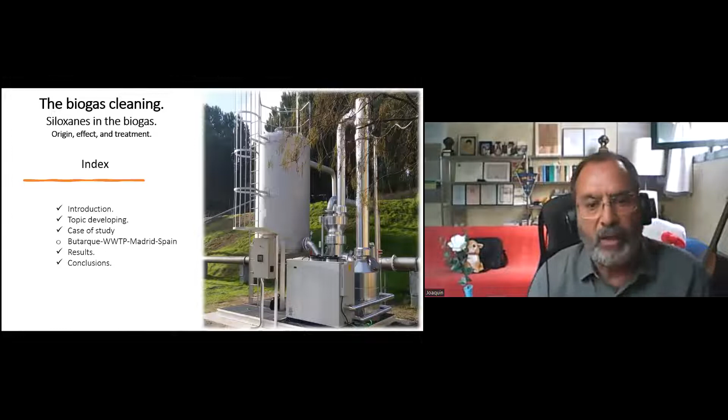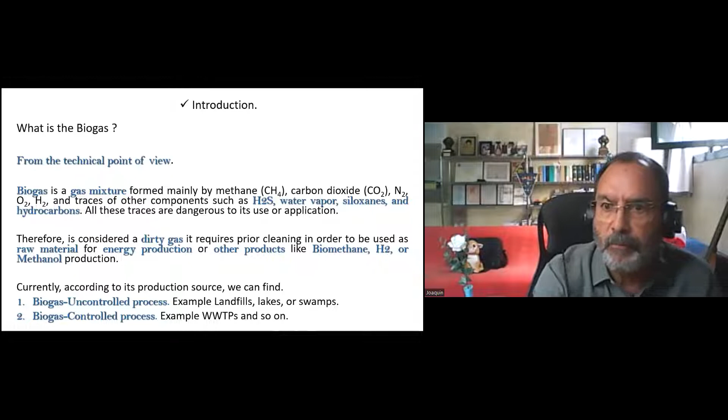Okay, what is the biogas? There are many definitions related with biogas, but for all people, staff, or engineering groups related with biogas cleaning, biogas is a gas mixture that has two main parts: one part, the major part, methane, carbon dioxide, oxygen, hydrogen, and other, and another part that is the impurity. These impurities are mainly hydrogen sulfide, water vapor, siloxane, and hydrocarbon. For that reason, biogas is always considered a dirty gas that requires prior cleaning in order to be used as raw material for energy production or for another product like biomethane, hydrogen, or methanol.

According to its production, we can find currently two kinds of biogas: biogas coming from an uncontrolled process, for example landfill gas, and biogas coming from a controlled process, for example wastewater treatment plant and other kinds of product by the digester process.

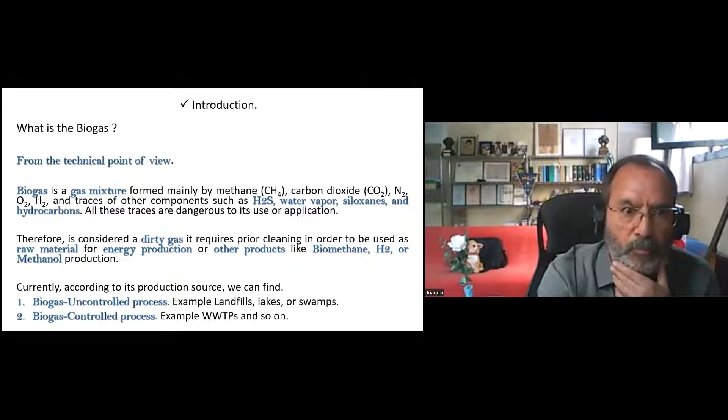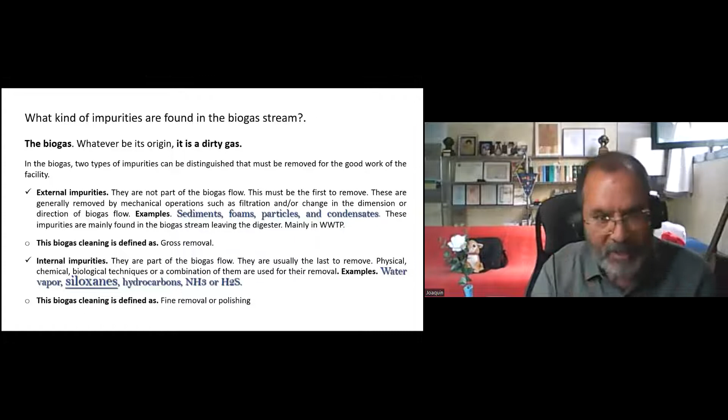The other impurity, the internal impurity, is part of the biogas fluid, belongs to the biogas fluid. This kind of impurity is removed by technique, by physical, chemical, biological, or a combination of them. In this internal impurity we can find water vapor, siloxane in the case of study, hydrocarbon, and hydrogen sulfide. In this case, the biogas cleaning is defined as polishing or fine removal.

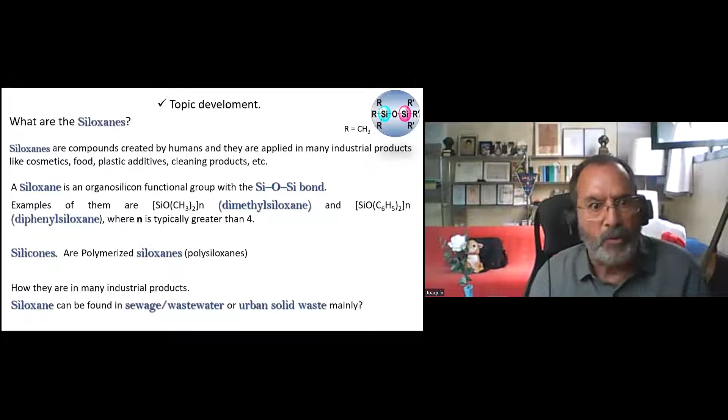What is siloxane? Siloxanes are compounds created by humans. For that reason, they appear in many industrial products like cosmetic, food, plastic additive, clean product, and so on. We can distinguish two kinds of siloxane: siloxane properly said is an organic silicon functional compound with functional group silicon-oxygen-silicon bond, and silicones, which are a polymerized siloxane.

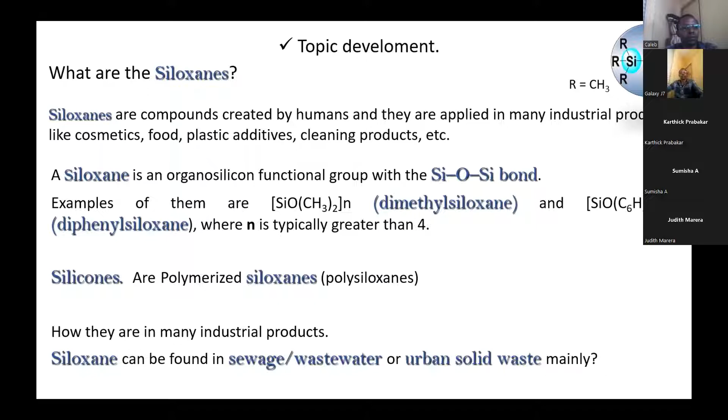Given how they appear in many industrial products, it is to be expected that siloxane can be found in wastewater or in urban solid waste. What happens with them is that when you use, in this case, the sludge coming from a wastewater treatment plant or municipal solid waste submitted to anaerobic digestion, the siloxanes are released and incorporated into the biogas fluid.

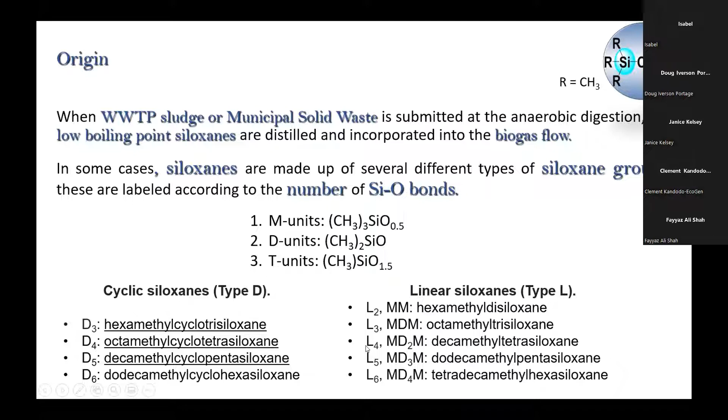Actually, there are two types of siloxane: cyclic siloxane, labeled type D, and linear siloxane, labeled type L. And with their families, in this case, D3 up to D6, L2 up to L6. This is the structure, the chemical structure unit of the linear siloxane and the cyclic siloxane, type L and type D.

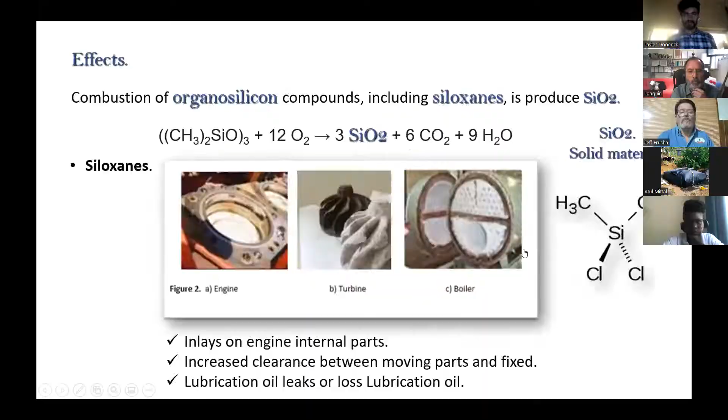What is the effect of the siloxane? When you use biogas to produce energy, you use different machines, for example engine, turbine, or boiler. As a result of the combustion process, silicon oxide appears. This silicon oxide is a solid material like fine sand, and for that reason the effect on the machine is like the engine, it increases the friction between moving parts and fixed parts and loses the lubrication oil.

If the siloxane has any halogenate group, for example chlorine or fluorine, acid chloride formation appears, and acid chloride causes another effect: oxidation of the internal parts of the engine, turbine, or boiler. And in this feature appears the deposit of the siloxane, the silicon, inside the engine, the turbine, and the steam boiler.

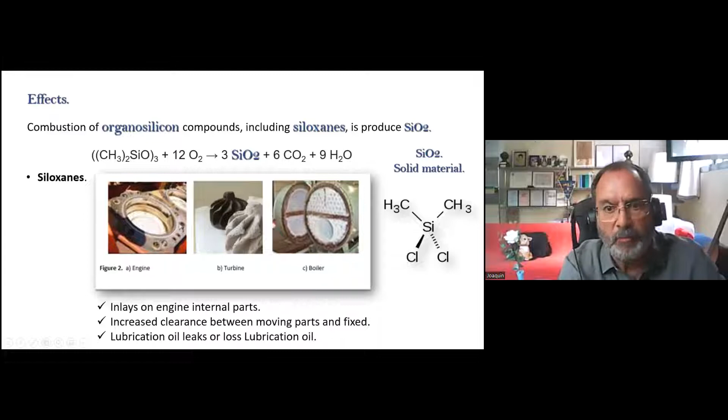What are the current techniques for removal of siloxane? Cooling, adsorption, washing with reagent, and combined technique. In cooling, cooling up to 4 Celsius degrees is the most useful technique at this moment, or cooling down to -25 Celsius degrees. In adsorption, active carbon, membrane, silica gel, or aluminum filters. In washing with reagent, methanol is used.

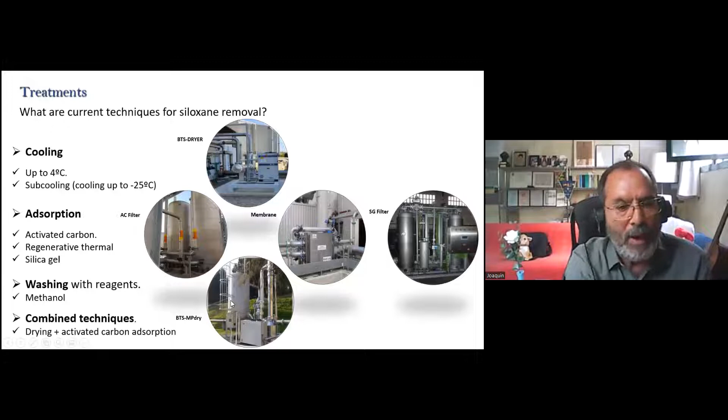Methanol washing is not useful currently, and there is a combined technique where you combine, for example, drying or cooling with active carbon to get this kind of technology. This is the BTS-MPdry, our development for the biogas cleaning in this case.

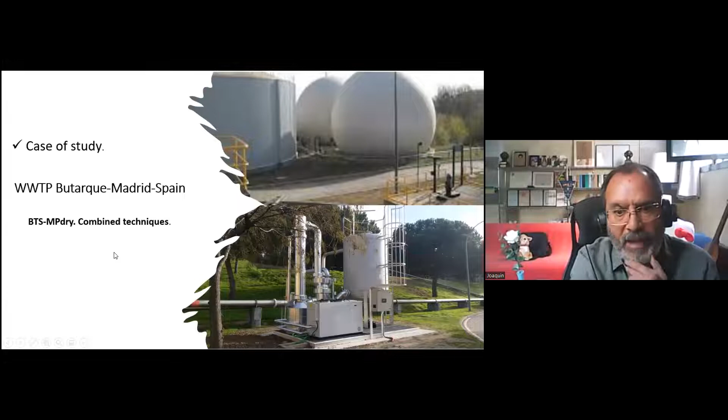This is the case of study, in the Butarque wastewater treatment plant here in Madrid, Spain, and BTS-MPdry is the brand of our product: a biogas treatment system, multi-purpose plant, based on dry technique. Let me explain in brief how our technology works.

Here you can see, please, our flow diagram, and here you can see a photo of our technology. The technology has two main parts: one related to cooling, and one related to the polishing or active carbon filter.

The cooling system has two parts. In this cooling system we have heat recovery. With the heat recovery we get good results, because due to the recovered energy we reduce the energy consumption of the chiller, and on the other side we reduce the relative humidity of the biogas going into the active carbon filter. For that reason, the performance of the active carbon is better, and the quality of the biogas cleaning is higher.

The second cooling system is this equipment. There are two cooling systems: thermal cooling and mechanical cooling. Thermal cooling is because cooling water is put in direct contact with the biogas, and after, due to the condenser, mechanical cooling appears. Then the cooled biogas is put in contact with the hot biogas, minimizing energy consumption and minimizing the relative humidity of the biogas. And for that reason, under this condition, the biogas gets into the polishing system, in this case the active carbon filter.

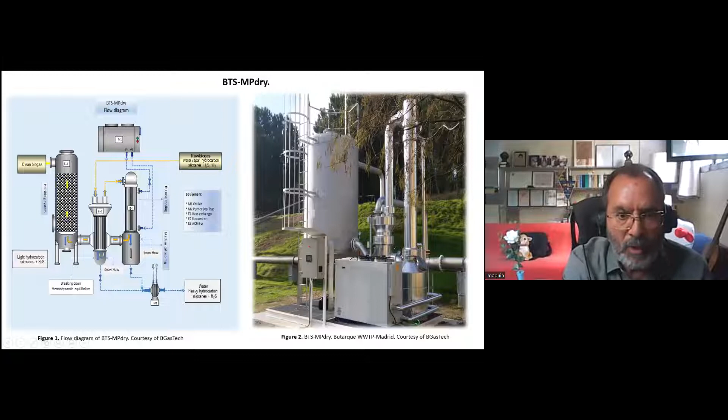What are the conditions this technology works with? In this case, the working temperature of the biogas outside the cooling system. The input condition is the biogas flow, in this case biogas temperature and biogas flow. And with this system, we work at a certain temperature.

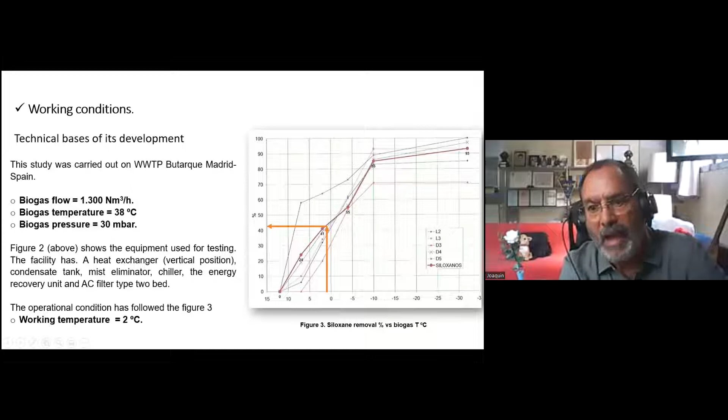When we work at this temperature, according to this chart relating siloxane removal versus temperature, working at this Celsius degree we can remove up to 40% of the siloxane contained in the biogas flow, mainly the siloxane types D, D3, D4, and D5. In this case, only siloxane type L is passed to the active carbon filter.

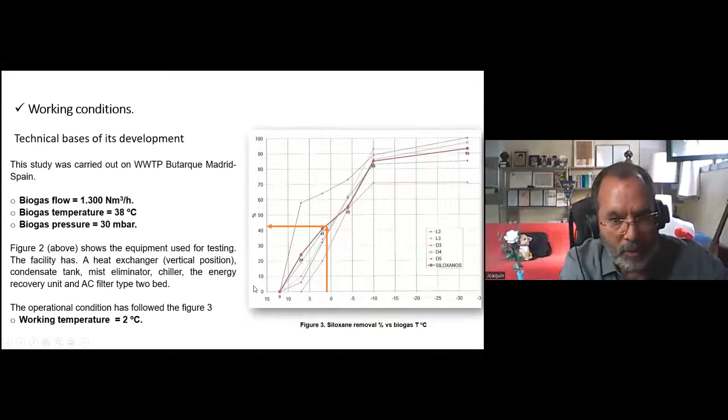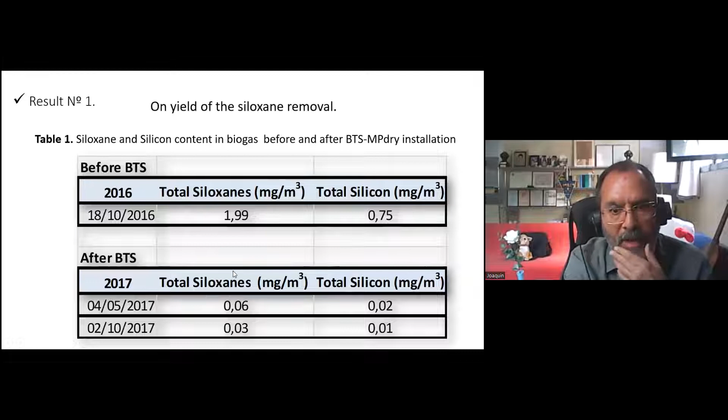For that reason, there is a decrease in the silicon in the biogas too. In this case, after applying BTS technology for biogas cleaning, it decreases from 1.99 to 0.03, and at the same time decreases the silicon.

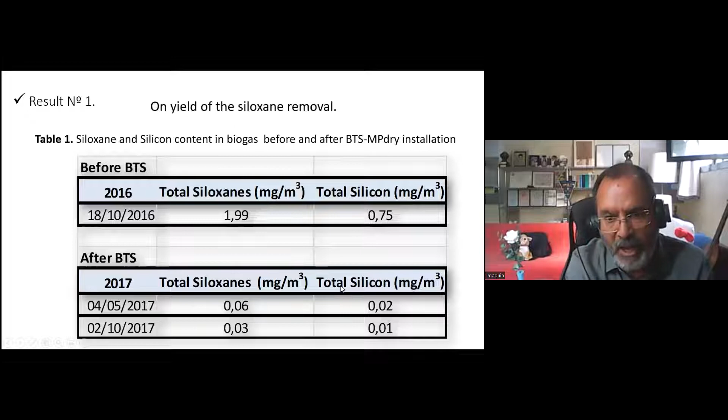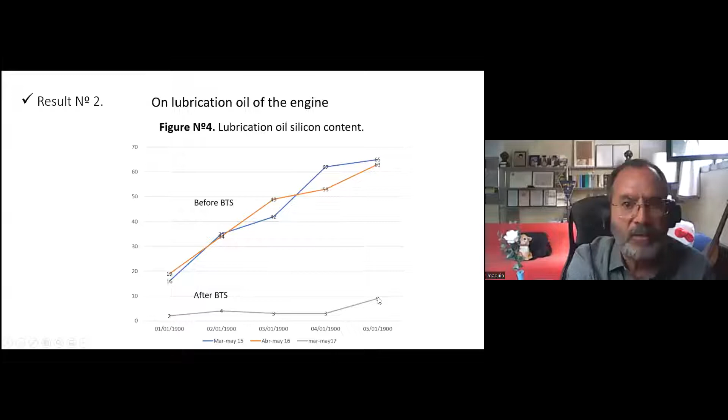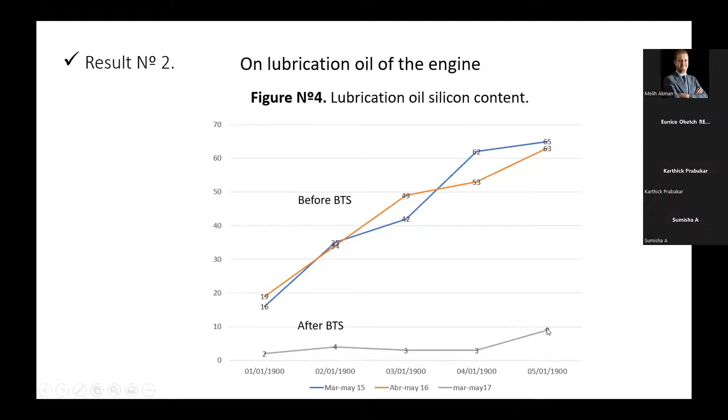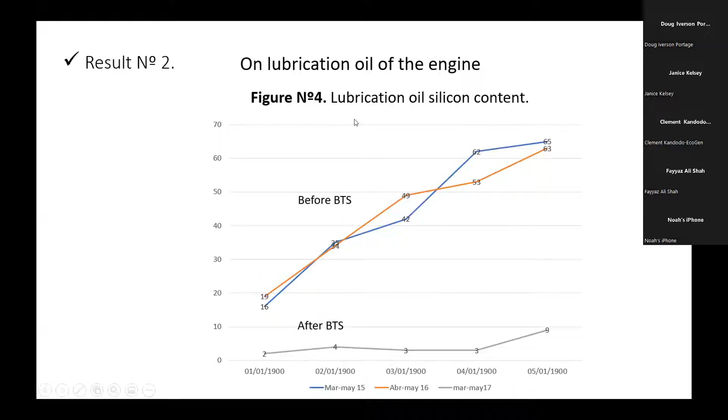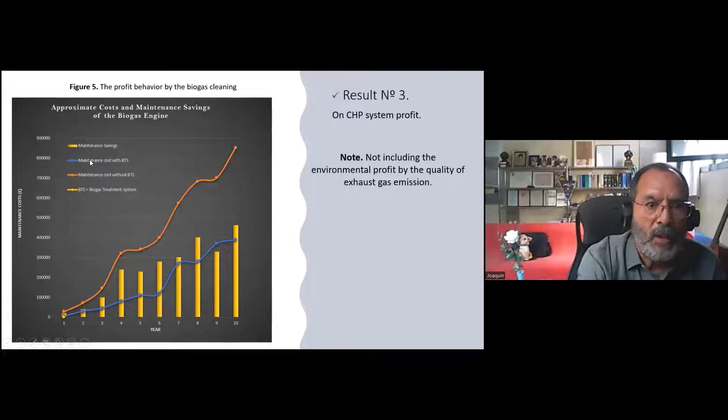For that reason, over 10 years, this is the amount that can be saved when you use this kind of technology, or when you clean your biogas before using it. This behavior does not include the environmental profit from the quality of the exhaust gas emission.

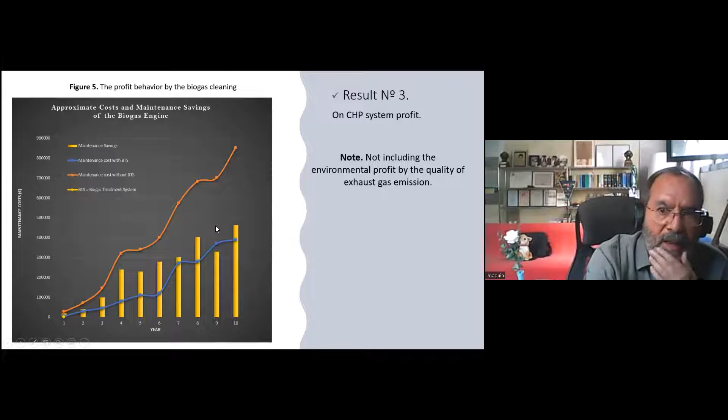As a result, with biogas cleaning, we can get optimal machine working, reduced maintenance costs, and a long useful life of the active carbon. This is the critical point in the operation cost of the technology: low OPEX due to reducing the energy consumption of the chiller and increasing the useful life of the active carbon, and the high quality of biogas cleaning.

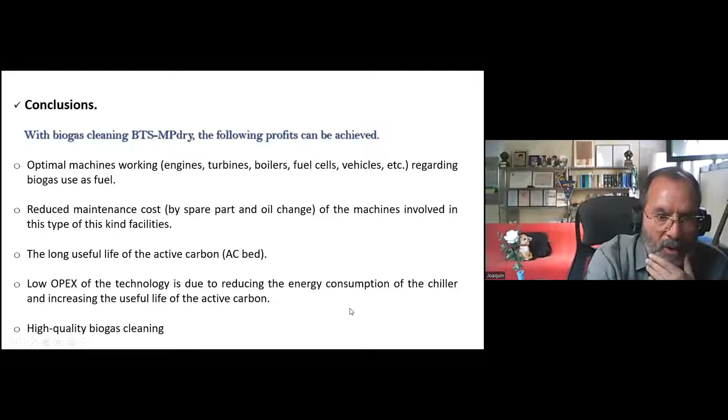Thank you for your attention. I am here for any questions.

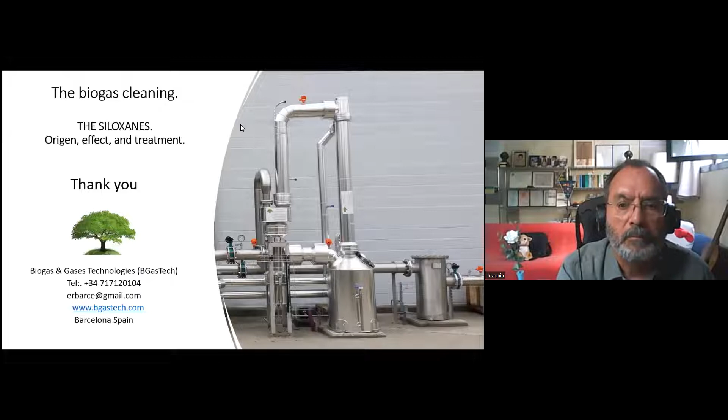Is there any question? I just put a question in the chat, I think it'll be easier for you to read it than to try to listen to me. Dr. Joaquín, will you see the message in the chat? Let me check... No, I don't see any question in the chat. Let me read my question.

Okay, first off, thank you, Dr. Joaquín. I'm wondering what are the chemicals in the biosolids that end up being converted into siloxanes in the biogas. Are the chemical sources natural, such as silicas and silicates, or are they caused by humans, such as silicone polymers? If it's from humans, can we make smarter choices in what we buy and use to minimize the problem that ends up in the biomaterial made in the biogas?

Yes. Okay. There's another question from Jeffrey Shaw.

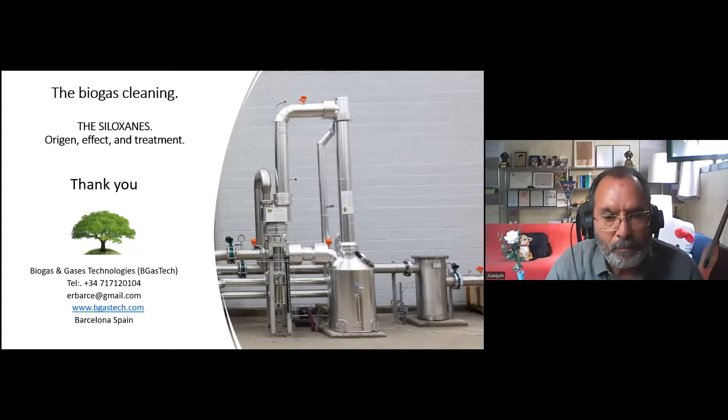Great explanation. So, any questions? Anyone wants to contact Dr. Joaquín Reina if anyone wants to.